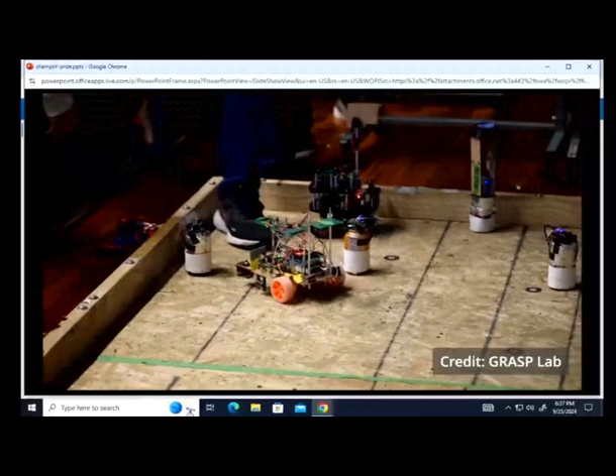My name is Mark Yim. I'm a professor in mechanical engineering at UPenn. I'm also the director of the GRASP lab, which is the oldest robotics research lab in the country. The goal of the lab is to explore and push what's possible with robotics. So if you saw Spider-Man with Doc Ock, the guy with these long arms out of his back, that's essentially what we're trying to do.

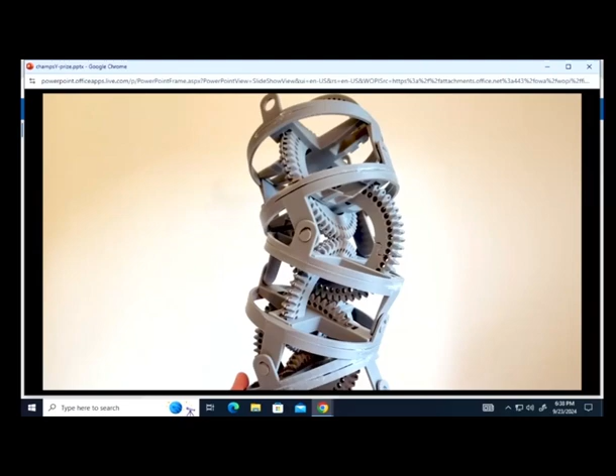So we've been prototyping a set of modules. The current version has about 6 modules, and each module articulates like an elbow. The ultimate version, we're hoping will have something like 100. The problem is if you have a motor in each module, it starts to get really heavy. If you want it to be stronger, you have to put a bigger motor, but a bigger motor's heavier, and so they could barely hold their own weight.

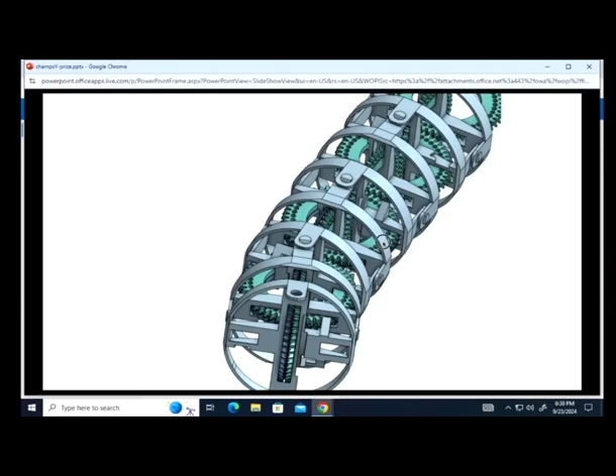And that's where the real advancement comes in, how we're actually moving them. One or two motors drive this transmission down the whole arm, and each module can tap into that spinning transmission to get the power and the rotation as you need it.

The interesting thing about this approach is that it can be rigid when it needs to, but it can also conform. If you have some structure and you want to wrap around it, the normal approach is you'd have to tell every degree of freedom how to move at the right angle exactly, which is very difficult to do, especially if you want to softly grab an object.

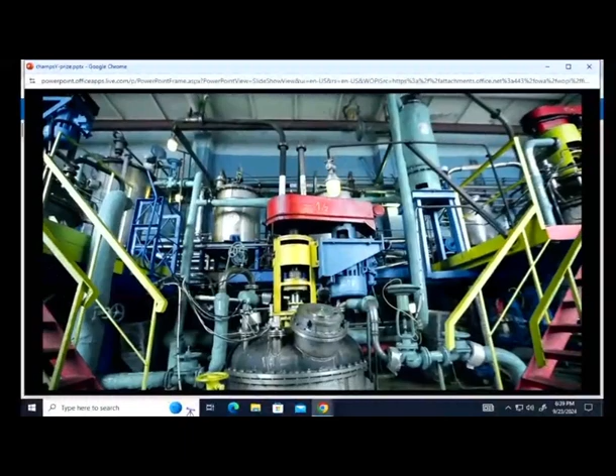This robot has the ability to apply the same forces around an object as it grabs it. It could be used for inspection, very tight spaces like engines or in a boat or an airplane or a car. The thing that I think is novel about this is that it can also apply forces, so we can reach into something and turn a bolt or grab an object or apply forces inside these constrained areas.

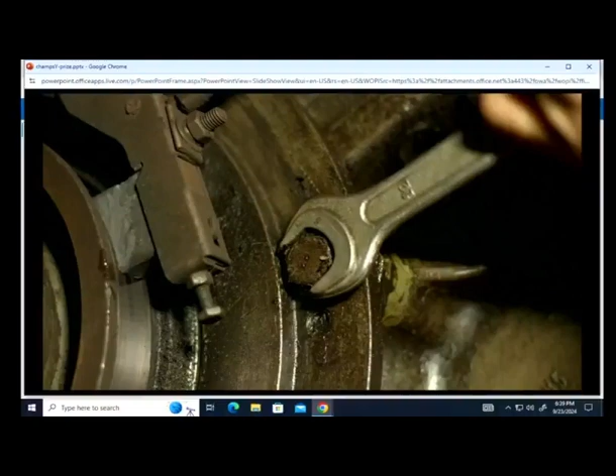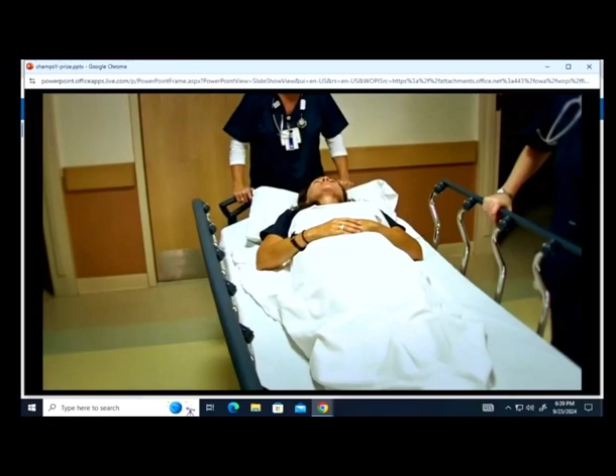We've been working with nurses. Moving patients around is something that they have to do all the time, adjusting people in a bed or bringing them into a wheelchair. Anytime you have to transition, moving people around is hard and can often lead to injuries. So if we can have a robotic device that can help them move people around, that could be really useful.

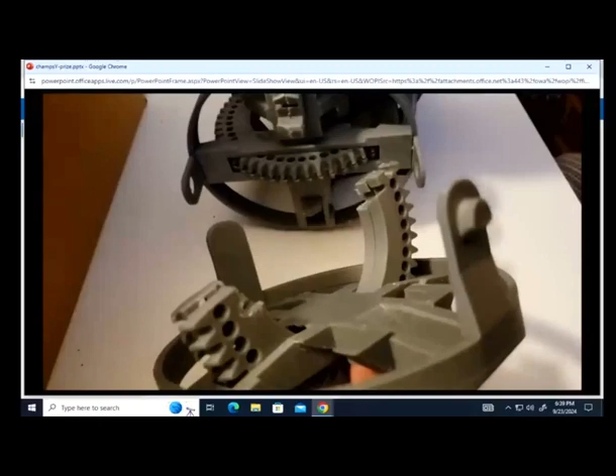One of the things that I think is really exciting for me is that I am not sure what this robot could be really good for, because it has all these different capabilities. One of the things that we need to do is find out what the right application could be and then focus on developing those particular capabilities. How far can we go in those capabilities is one of the directions that we are trying to figure out.

So then I think I was pretty impressed with the video editor guy who put this together, partially because he just got so many different pieces to come together, all these other things.

So there are two primary differences between this work and the existing work. One is that it can actually be expected to be much cheaper, much lower cost.

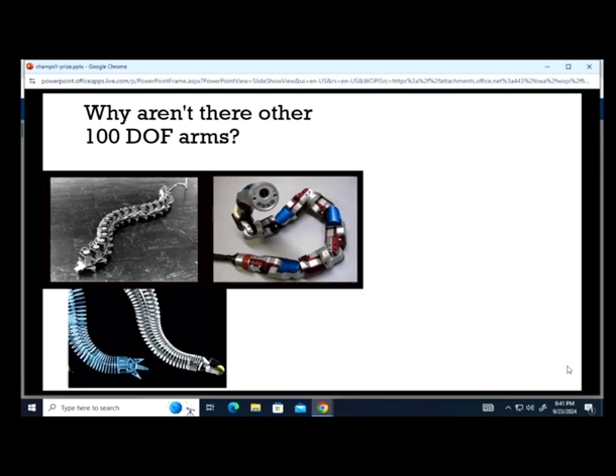Okay, so these are examples of things from decades ago, snake-like robots. Usually the snake-like robots are always moving on the ground because they aren't strong enough to lift themselves up. If you were to cantilever them out, usually you can only hold maybe 4, 5, 6 modules before it just can't hold itself up. There are these soft robots that are similar - that's a new thing from the past decade, roughly, where people are talking about making elephant arms or things out of rubber and pneumatics and that type of thing. Those are really weak. Almost always when you have a manipulator, they always show it hanging down, and they do things below it because it can't even lift itself up, just because it's relatively weak.

So this is the type of thing that currently exists, which is cable-driven. There is a company currently that's now a subsidiary of GE, where they have this 24-link arm, 24 degrees of freedom, and it does things like inspection inside of airplane engines and airplane wings and that type of thing.

This whole structure back here is part of the robot. So they have cables running down here, and all of the motors are behind it. And all the ones that are like this type of cable-driven system have this giant structure behind it with one motor for every degree of freedom.

That's why they're capable of doing things, but they can't really have much of a payload at the end, because the weight just kind of adds up. And also it's what makes it really expensive. So I think we can probably get maybe an order of magnitude lower cost.

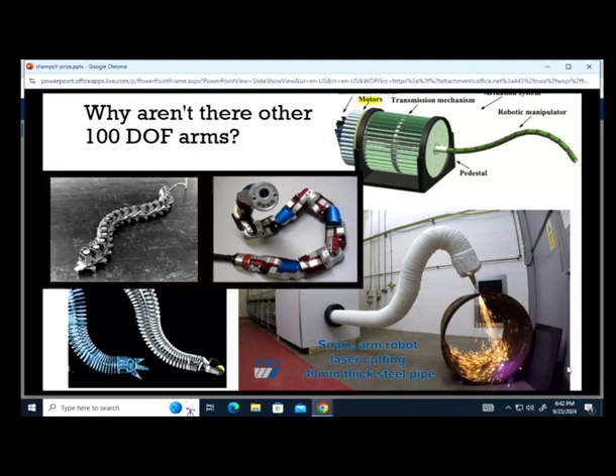The primary thing we're doing is the transmission that we have.

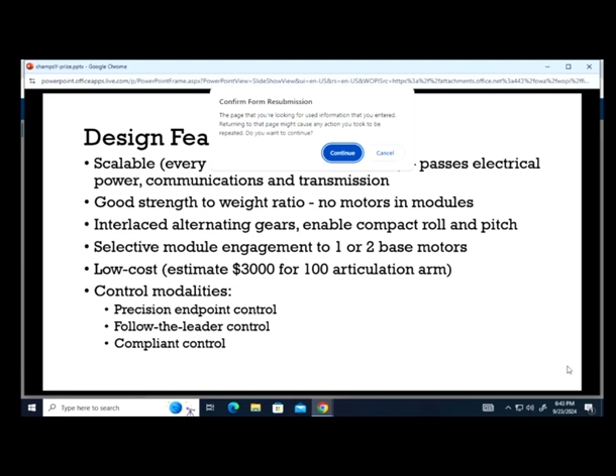I'm planning for this to be scalable, with up to 100 degrees of freedom, maybe more. Things start to get more difficult as you add more and more articulations.

The main thing is the strength to weight ratio. The way we have the transmission, you don't have to have a motor at every part. You just have a small solenoid, which can be very small and weak. We have a transmission with just a couple motors at the base which pass the mechanical power down, and the little solenoids or other types of clutches, which are very lightweight, can engage in that transmission to get the turn you like.

I estimate it'll be about $3,000 for about a 100-articulation robot arm. Currently, commercially available ones with 24 degrees of freedom cost somewhere between $50,000 and $100,000.

The other unique thing is, besides the typical use for an inspection arm, is what they call follow the leader, where the body of the robot follows the head, so you can snake inside wherever you need to go, whatever the path may be. This robot can do that, but it also has several other modalities which make it kind of interesting, partly because it has so many degrees of freedom.

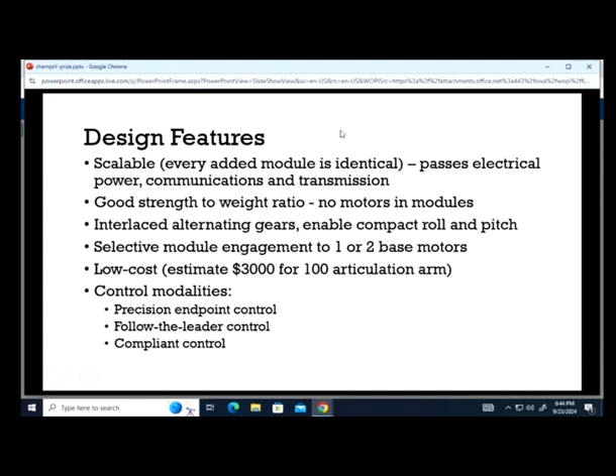So this is just a bit more detail. If anyone's curious about how this works, one of the key things that's interesting is it's gear driven, a gear transmission, and not cable driven, which most of the other snake systems are.

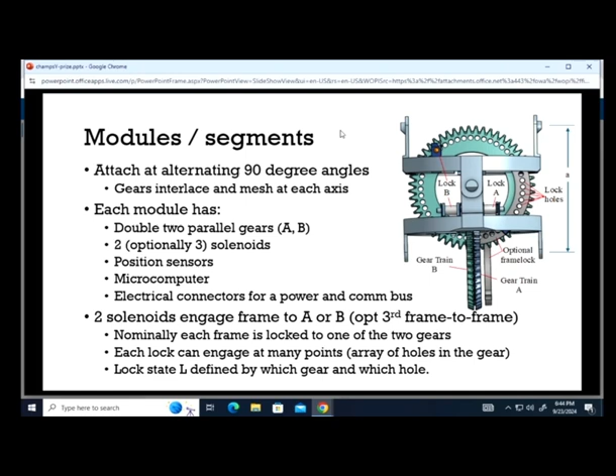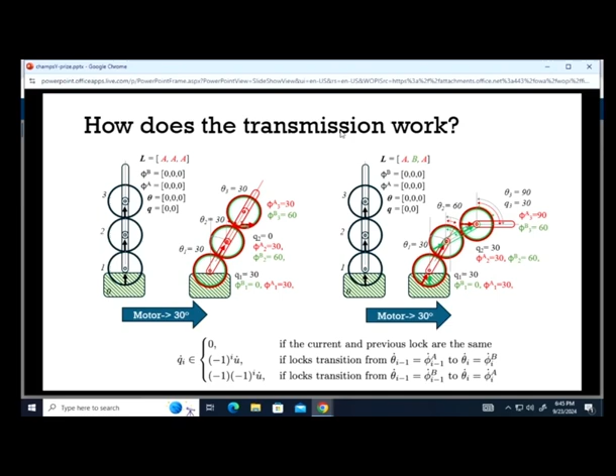We figured out how the transmission works, all the equations for where things go as you go down the line. I won't go into details.

The reachable space is interesting because there are 100 degrees of freedom. The space is a 100-dimensional space, which means you can reach anywhere, with all these different combinations of things you can do.

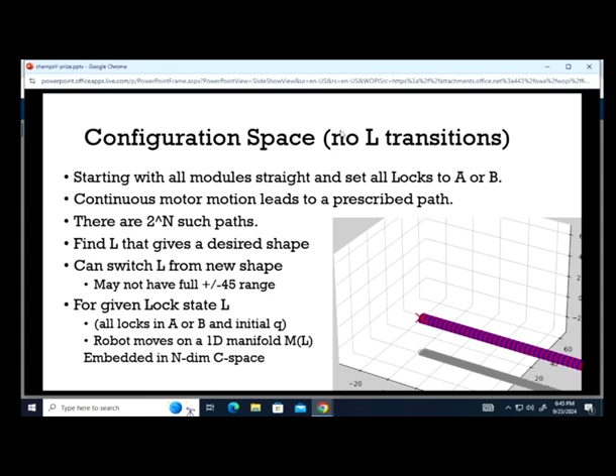One of the things we can do is simulate another serial robot arm, like ones typically defined by link lengths, how long each part of the arm is, and the degrees of freedom at the ends. This system can emulate almost any robot that has revolute joints at each end.

It can't do everything, in the sense that one thing we're losing by having this type of transmission is we only have one or two motors instead of 6 or 100 motors, which means there's what we call a constant speed constraint. The arms can move, but every joint has to move at the same speed, whereas with 100 independent motors, every joint could move however you like.

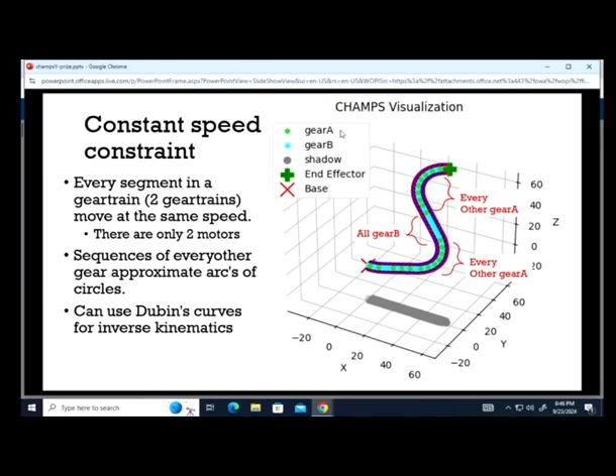You have to switch between the motors, the transmission has to switch, and if you have some complex motion, you might have to do a lot of switches. That's theoretically possible, but the motion tends to be a little less smooth.

We can do the follow-the-leader motion. The other interesting thing is, with so many degrees of freedom, there are many different ways of doing things.

The worst way to lift something, unless you're a weightlifter doing it on purpose, is straight out, because you get all this torque in the shoulder joint from the long radial arm. To carry a heavier weight, instead of going straight out, you might bring it in close and then go up, so you don't have all that torque.

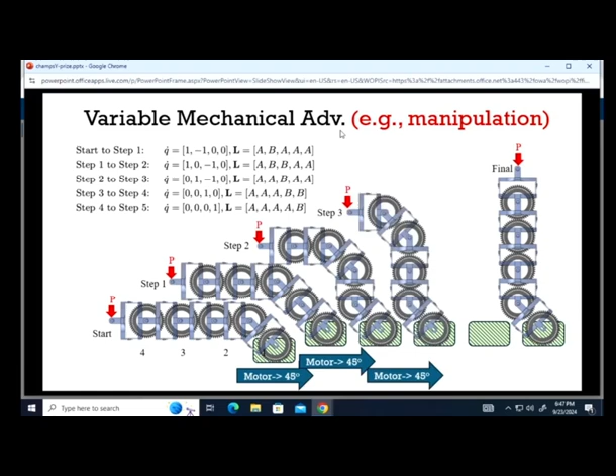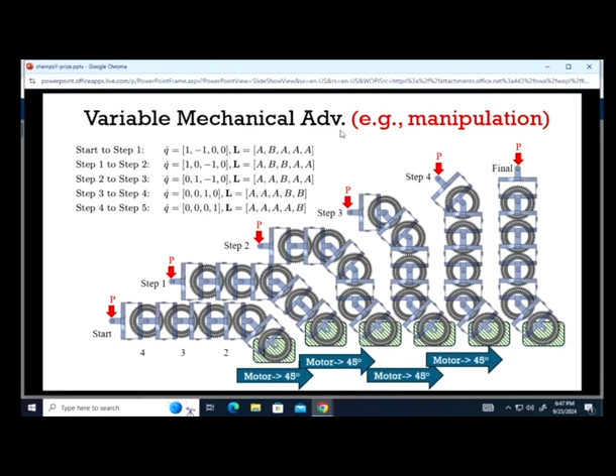Because this has so many degrees of freedom, you can take advantage of this, minimizing the radial arm length to minimize torque. You can also take advantage of singularities in the Jacobian space to get near-infinite mechanical advantage, so there are ways to apply or carry very large loads because you have the ability to configure in different orientations.

We also have the ability to conform to things. So even without sensing and knowing what angles you need, you could have some joints which are free to move somewhat. And so as you move, if the arm bumps into something, it'll naturally curl around it without having to tell it to move this degree of freedom.

Just as you move and make contact, it'll naturally curl around something. And ultimately, when you have it surrounding the object, you'll end up with an equal force on each contact point, which will minimize the maximum stress that you might have on the object you're grabbing.

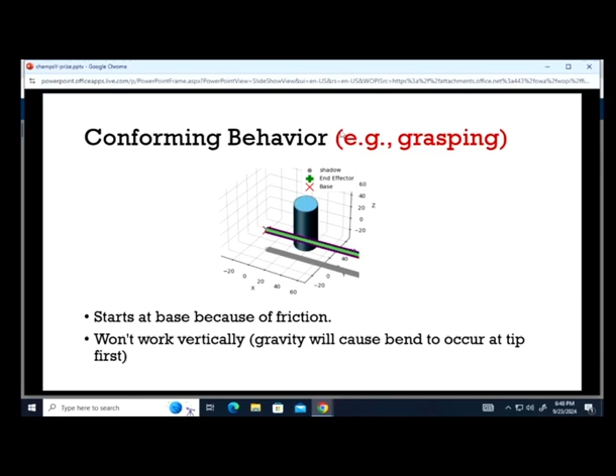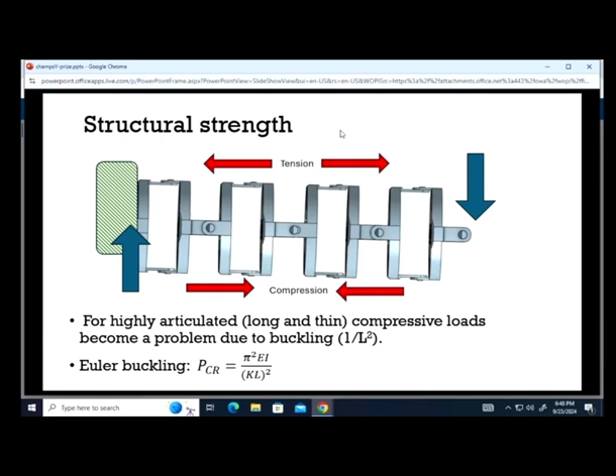There are some limitations currently that we're exploring, which is that taking advantage of this mechanical advantage means you also rely on the structural strength of the system. So you have to design the system so the strength ratio of the structure is different—you might need metal pieces close up and plastic as you go out, in order to maximize the strength-to-weight ratio, which we're still exploring.

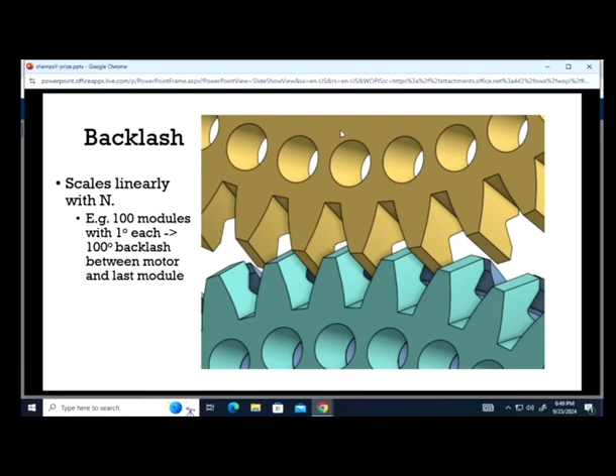Backlash is currently a huge problem. Because the modules build up end to end, the backlash adds as you add more and more. We actually have a new transmission that we're currently prototyping, and I'm talking to PCI about filing an update to the patent for this new version, which will have better backlash performance.

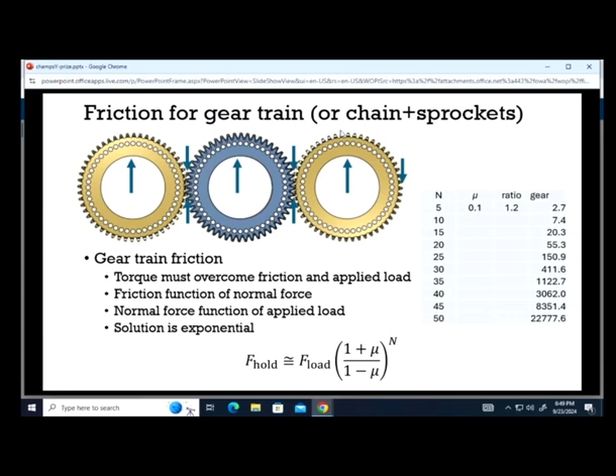Friction is also a big problem, which I think will also be solved with this new transmission, but I won't go into details on that. So I'm going to stop the presentation here and leave room for questions.

Maybe that's the best way. I've got a train to catch, so I won't be able to stay after—I'm going to miss Professor Sung's talk. I already know what it is, and it's really cool stuff, it's not that I'm not interested, but I do need to go. So maybe we can leave the last part. How much time do I have? We have about 10 minutes for questions.

Be more interactive. So you mentioned you're currently working with nurses at hospitals to help them move patients around—how do you envision incorporating that into the hospital? Are you putting the arm into chairs and things? Yeah, exactly, it would be mounted into the infrastructure, ideally. One of the things they have currently in the hospital is something called a Hoyer lift, which is a big frame you bring up to the patient, wrap it around them, and pull them up—that's how you move them from bed to chair or chair to toilet. So they already have some infrastructure for that, and we might be able to do something similar.

So for the quoted base cost of $3,000 for the 100-articulation arm, say we have an application that doesn't require 100 articulations—do you have any idea how the cost would scale with each articulation? Yeah, so the base cost is probably going to be around $2,000, and the added cost per module is much less. There's another question on that side.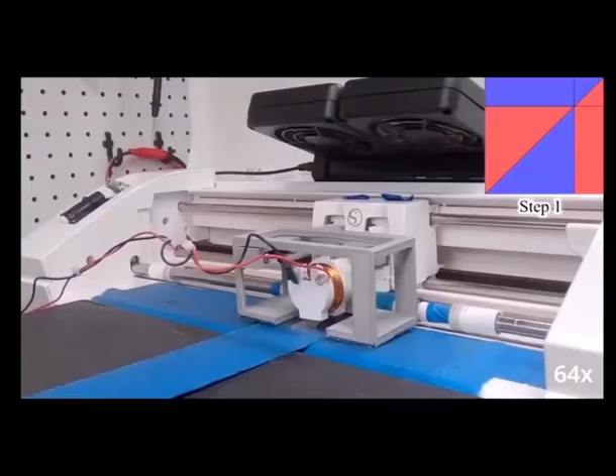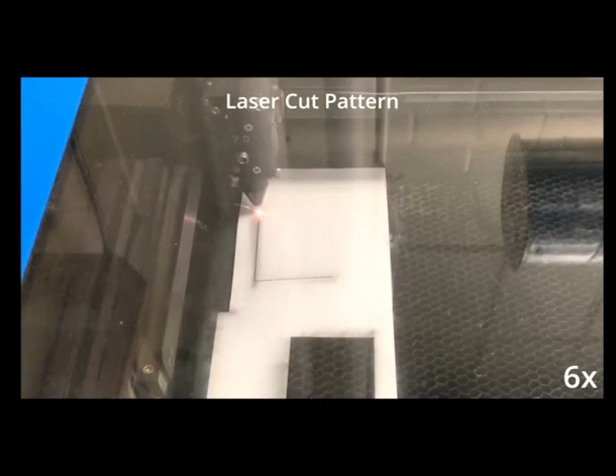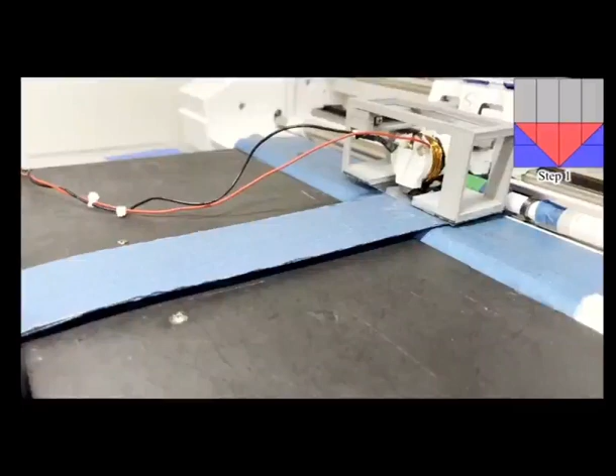I'm Cynthia Sung, an assistant professor in mechanical engineering at Penn and a member of the GRASP lab, the General Robotics Automation Sensing and Perception lab. The project we've been working on is about taking advantage of origami-inspired design to create transformable shapes. A lot of my work focuses on programmable matter and self-folding origami structures. How can you give these origami shapes the ability to shape change to do some sort of task? We can combine hinges or folds of an origami structure with magnetic actuation to take 2D magnetic sheets and automatically fold them into complex 3D structures. There are two major steps. The first is the actual fabrication of the sheet, which has three different layers, where the top and bottom layers are made of magnetic material, and the middle layer is a connective mesh material that holds all of the faces together. The second step is to take that sheet and put it onto the conveyor belt, then tell the entire system that you want it to fold into, say, an airplane or a boat, and then you just click go. It brings the sheet over to our programming head to program the individual magnetic panels with a particular magnetic polarity.

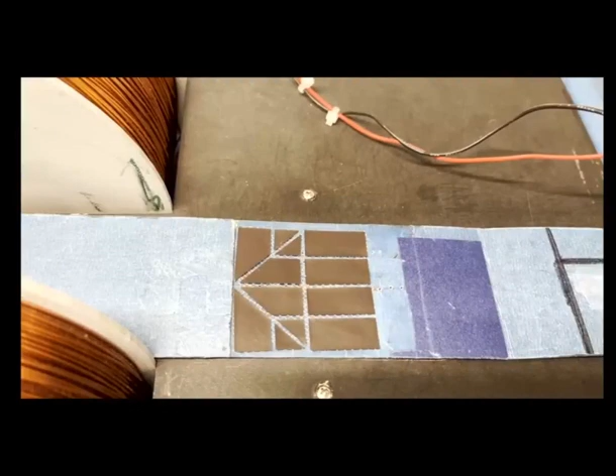Then it's going to bring that sheet to a particular folding coil set. And then the system will automatically start this actuation or folding sequence, depending on what the finalized structure is. The folding occurs in less than 1 second. One of the big advantages of this system is that we're able to really easily execute multi-step folding sequences. We can rewrite the program even in the folded state and then continue to fold the structure over multiple steps.

So now you can get a recyclable sheet, which you can fold into one shape, unfold, fold into a different shape, and basically customize to use as you need. There's a lot of interest in creating these kind of transformers, right? There's tables that open and close in order to get bigger or smaller. There are stools that turn into ladders. You can change a sitting desk into a standing desk. What we're trying to do with the system is that idea, but on a more extreme scale.

What excites me the most is having people come up with ideas about how to use the system. Every time I meet origami artists or engineers, they're all like, what are you going to fold next? And I was like, well, what do you want me to fold next? I know the technology really well, but I'm not quite sure what to use it for.

Maybe in the future we can think about sheets of magnetic material that can change into a toolbox of tools. You can change into a screwdriver if you need to screw, or a wrench if you need to tighten a nut, or change into a hammer if you need to hit something. We don't yet see that capability currently in the real world because people don't really know how to design or fabricate those sorts of structures. And with this system, we're really trying to push the fabrication for those sorts of things.

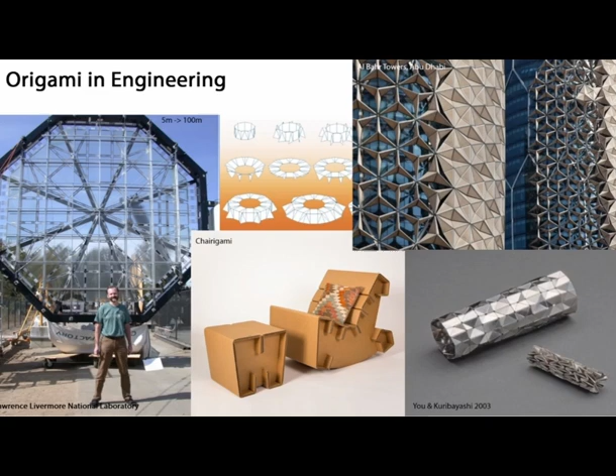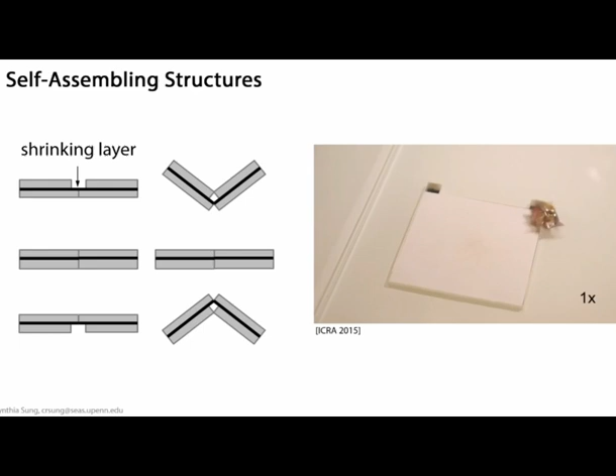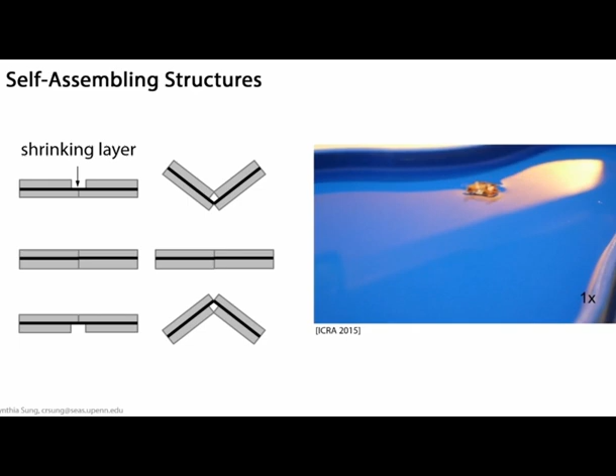But one of the challenges with these sorts of structures is that most of them have to be assembled manually, so you have to really love folding to put them together, right? And so one of the things we've been doing is trying to explore how we can create structures that fold themselves. This is an old video from 2015 where we tried to do this, and actually this is also very similar to what a lot of other groups do around the world, where we embedded active materials into a folded structure. When you expose this structure to heat, for example, it'll fold itself into, in this case, this little crawly robot. And then now you have this 3D shape that assembled itself within a couple of seconds, and you don't necessarily need to be an origami enthusiast to build this robot yourself, right?

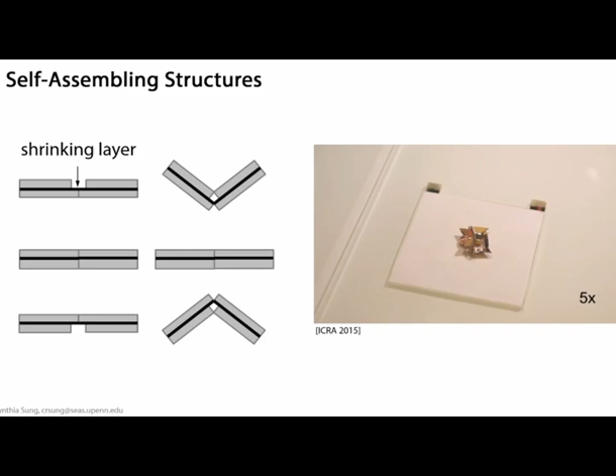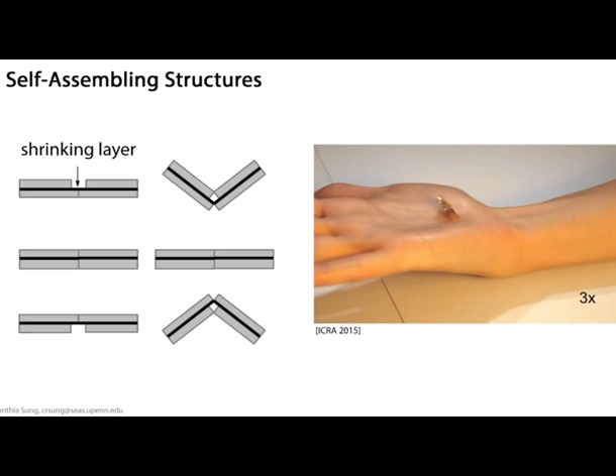So these sorts of things have existed, and people know how to build these self-folding structures, but the challenge is if you look at this video, this whole structure folds itself, but then it can't unfold, you can't change its shape. The shape of this structure is embedded directly into the fold pattern, so we can only fold into this one shape, right? And so what we were interested in was, well, what happens if we want to create more complex structures? What if we want structures that we can reprogram and refold and kind of do this process repeatedly? So this is the system that you saw in the video just now.

Actually, the edited video did a really good job of talking about the different components, so I'm not going to really go through all of them, except to say that the main component that we're really excited about here is this magnetic sheet, which paired with this magnetic write head allows us to basically program the folding behavior of this material at a pixel level.

So what you're seeing here is a picture of the sheet. It's just black. It's like refrigerator magnet. So you take that, you put it in the laser cutter, you can cut out the fold pattern. But then if you take a magnetic write head electromagnet and you put that magnet really close to the sheet at particular places, you can program that sheet with north and south facing fields. This is basically exactly the same way your hard drive stores data. Right? So your hard drive is also storing data magnetically. That's what we're doing on these sheets.

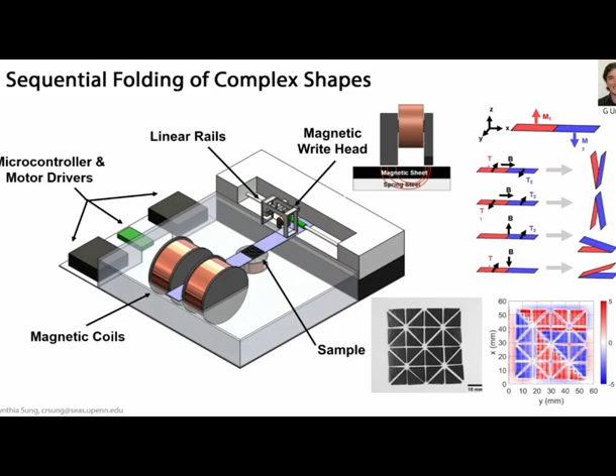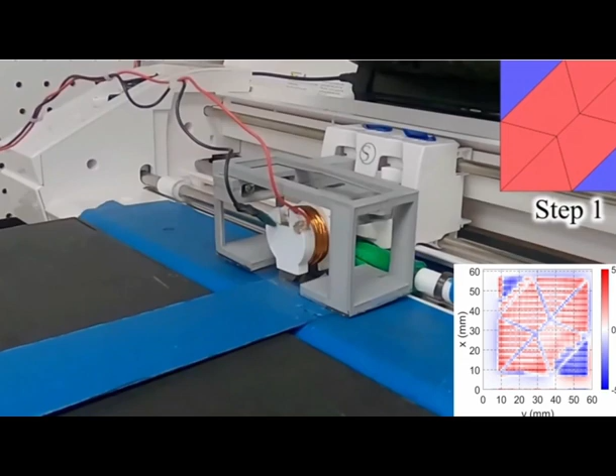Now, what's interesting is that when the sheet then gets exposed to an external magnetic field, it'll self-fold, right? So you saw videos earlier of examples of the sorts of things that can be folded using these structures. I'm just going to have this video play in the background. But it's really an automated process now that we've developed for allowing us to program and then fold these structures, and then you can reprogram them and refold them as you need.

What we think is really exciting about this is that, well, in this case, you're seeing a very specific magnetic laminate that we're programming. It's basically this refrigerator magnet, a polyester mesh, and then a refrigerator magnet on the third layer. And that allows us to get this particular pattern. But actually, the fabrication process for creating these sorts of structures, we think, is quite general.

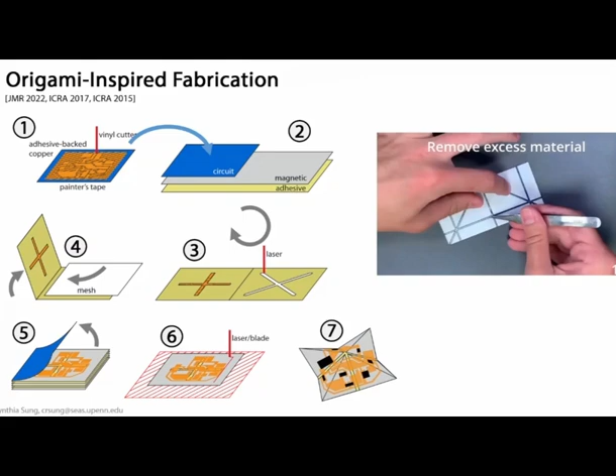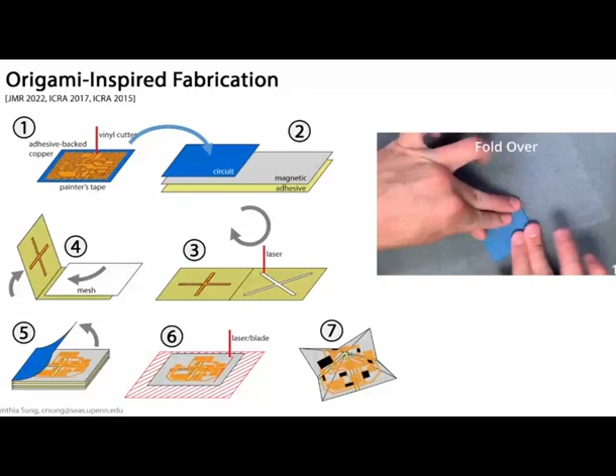So what we've developed is this laminate-based fabrication approach where you take these layers of passive material, magnetic material, potentially active material, and sometimes even circuitry, and you can put them in layers to create these multi-material sheets. As long as you can make sure the sheets adhere together, then each of the layers provides your structure with some kind of functionality. So in this case, our magnetic layers are giving us the ability to do this self-folding.

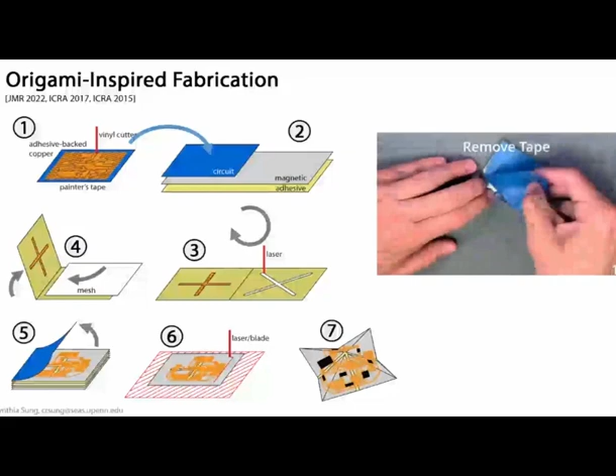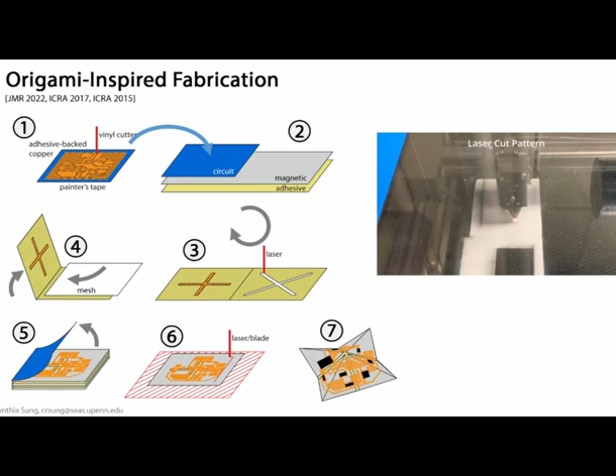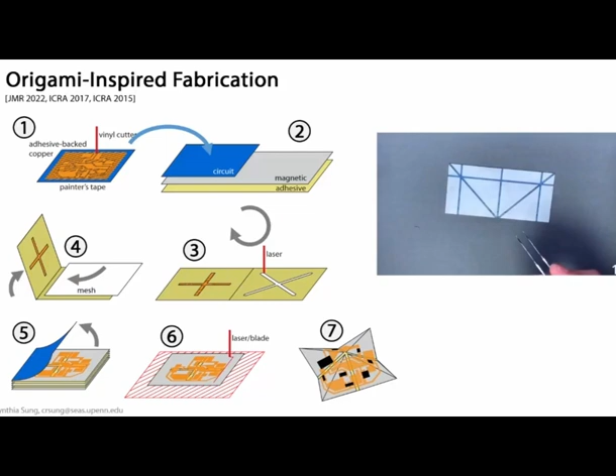But you see in this diagram, we can also add in smart materials for response to heat. You can put in circuitry there to add electronic components, right? And depending on what you want this structure to do, you can change the materials in this structure. So, for example, one of the things that we've done most recently is we've also embedded, for example, PLA that you might get out of your 3D printer. Right, so you can layer these magnetic sheets together with PLA layers, and now you have a layer that's both thermally responsive but also potentially stiff.

And so you can think of the structures that take advantage of the magnetic component to fold. You can heat the structure in order to soften the middle layer, fold it into place, and then when you cool down the structure, you get more solid, folded 3D structures that can now bear load. So this structure here is about 2 grams, but it's carrying this 1 kilogram mass after it's folded, super lightweight, but is able to achieve this shape.

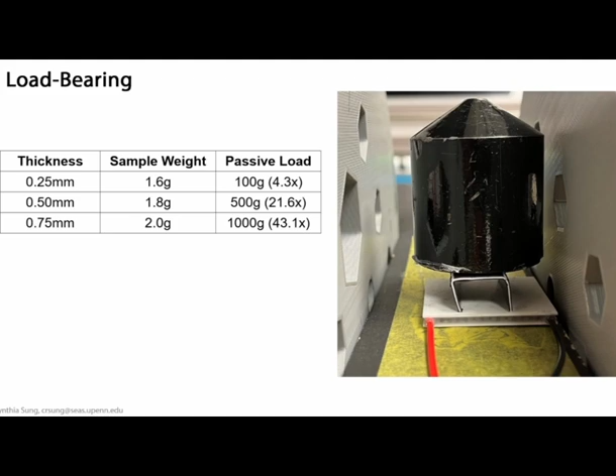Not only that, but one of the things that we've seen is that the resolution at which we can program these structures is really, really controllable. So because we're dealing with electromagnetics, as long as we can create a large enough electromagnetic field, we can overwrite whatever existing magnetic program is on the sheet. Which means that regardless of the size of your magnetic write head, you can overwrite what you've already written to get smaller and smaller pieces, which means you can change the resolution of your magnetic program.

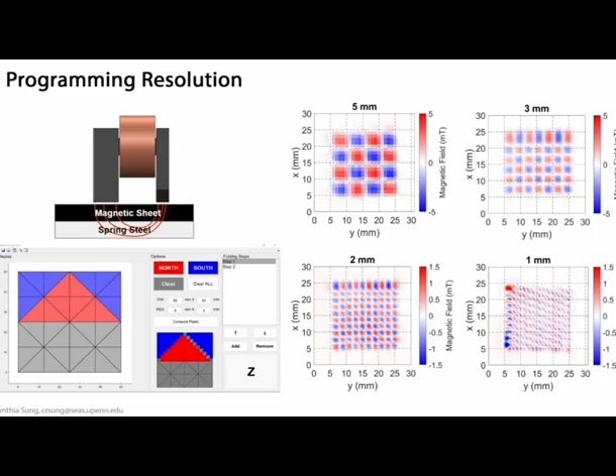Right, so what you're seeing here are different resolutions of checkerboards that we programmed to demonstrate this ability to change resolution. And now, not only that, but we can support this sort of programming with a graphical user interface where we can directly convert things that you might want to program, in this case, north and south facing fields on particular faces, into a magnetic program at a particular resolution and automatically send it to the system for fabrication. So we've folded a whole bunch of different structures using this system. You're seeing examples up top.

And also one video in the middle. A lot of these are just origami patterns that we found in a book that were things that we liked. None of them really have any specific intended functionality, but you can see the range of different types of shapes that we can create. We've also taken the exact same shapes, unfolded them, reprogrammed them.

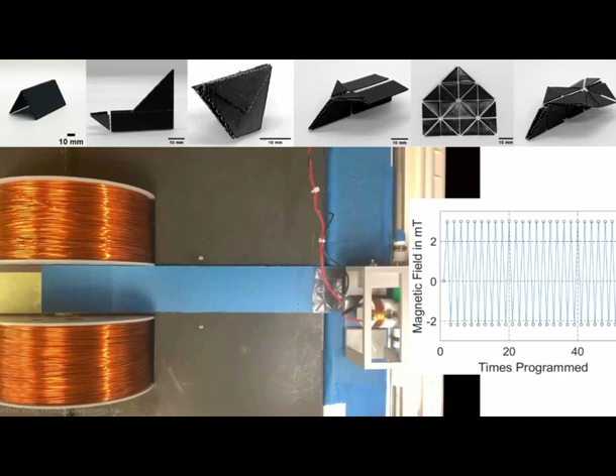And what you're seeing in this plot here is the change in magnetic field over multiple programming cycles. And what you should be seeing is that there's no change in magnitude of magnetic field over multiple programming cycles, right? And so basically, what we found is that this sheet is really reprogrammable, and so you get a lot of repeatability and consistency over these different programming modes, which means that you can take the exact same sheet, reprogram it, and change it into these different shapes.

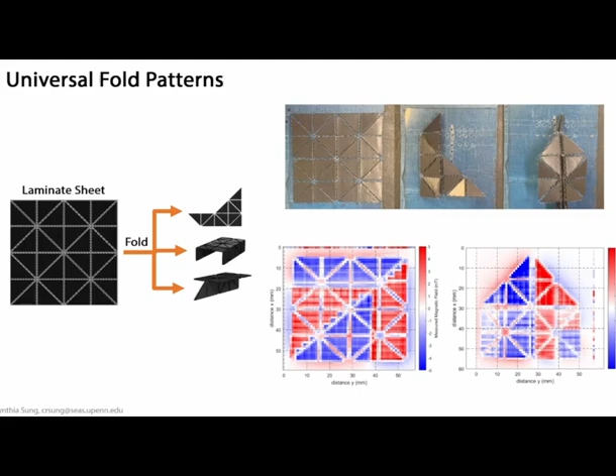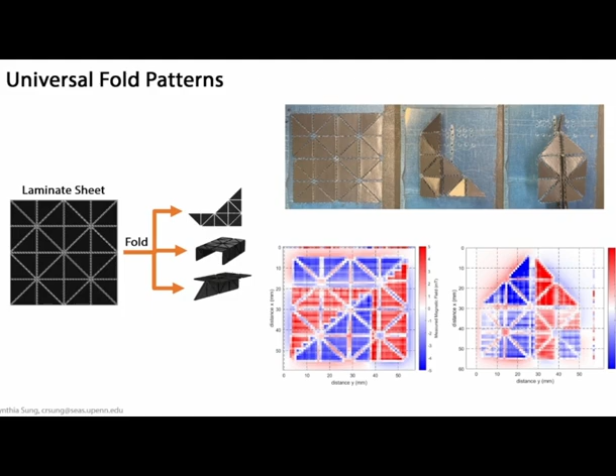So this here is an example of what is known as a universal fold pattern. It's provably able to produce any 3D structure to within the resolution of one square of this pattern. And so you can take this pattern, if you put the right program on it, you can pretty much achieve anything that you want up to the resolution constraint, of course.

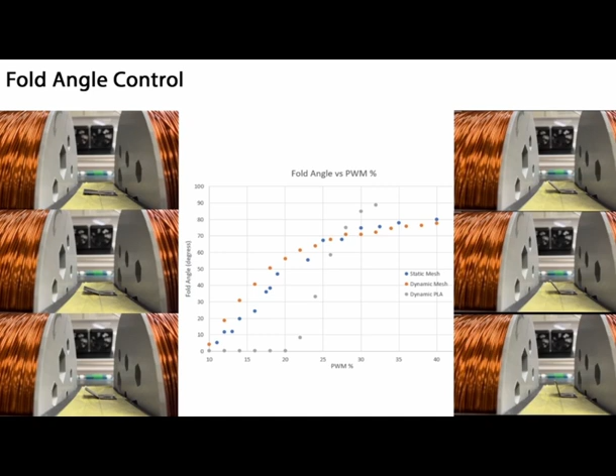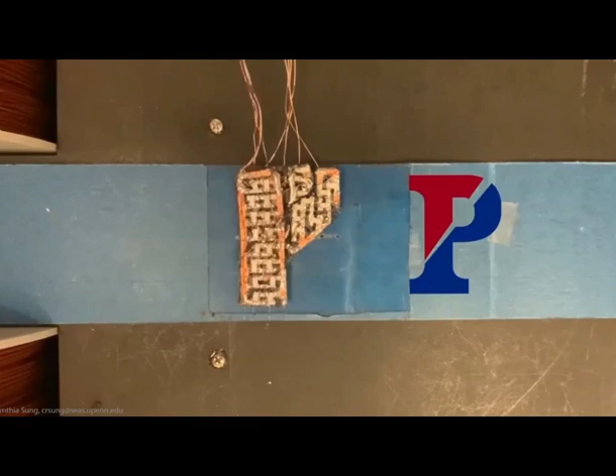We can also then, as I said before, integrate electronics. So what you're seeing here is an example where we folded a structure now with circuitry on it. You can fold it into a P, have LEDs, and have these sorts of active structures. In this case, we call it our foldable display. But you can kind of imagine the sorts of things you might be able to embed, not just LEDs, but maybe sensors or actuators.

Are the checkerboard patterns for the magnetic polarity, are those human created, or is there some sort of algorithm that spits those out? Yeah, so in our case, the checkerboard pattern was human created, although you can also create it automatically, right? Basically, once you set the pixel size for your system, you're just alternating the south-facing pixels, and so the system can go in and program that automatically.